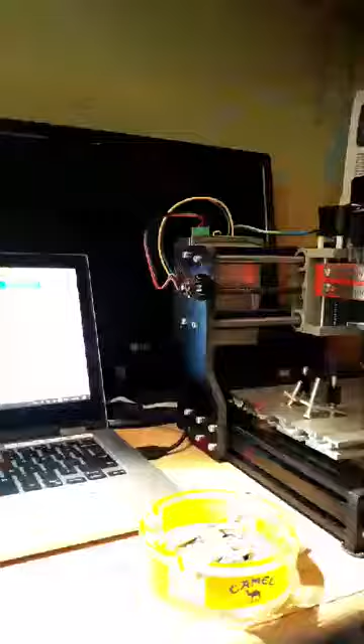I finally got my machine running today. I'll show you. I cracked my bracket, so I put these on. Works great. I did just a couple test carves, making some coasters. Here's one I haven't painted yet. And here's another one I have to finish sanding, but just been playing around with it.

Hopefully some more people will come on here. Oh, you're at work, huh, Timothy? It's pretty cool if you can watch us at work, man.

Today I was thinking about talking about the metric system. A lot of people seem to have problems with the metric system. And as I've told everybody before, inches and CNC do not play well together. Inches are divided up into 12, and everything in the CNC world is in 10 decimal. So it kind of makes it difficult to work with unless you have a machinist's ruler in inches that's divided up into decimal. That's the only way you can measure it and stuff.

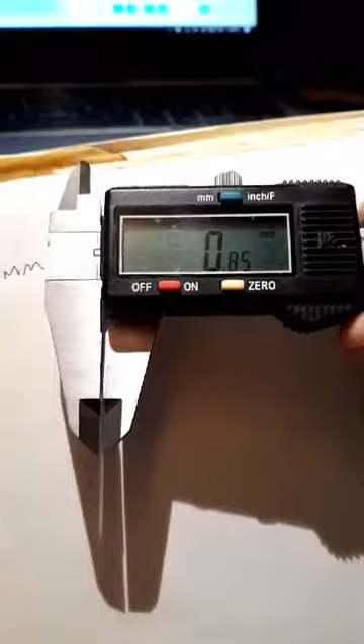But the thing about learning millimeters is, do not try to convert. If you're going to try to convert millimeters or the metric system to inches, you are shooting yourself in the foot. Okay? Do not try to convert it. What you want to do is learn it the way it is. Now, 1 millimeter, I showed you how small it is. I mean, it's about that wide, okay?

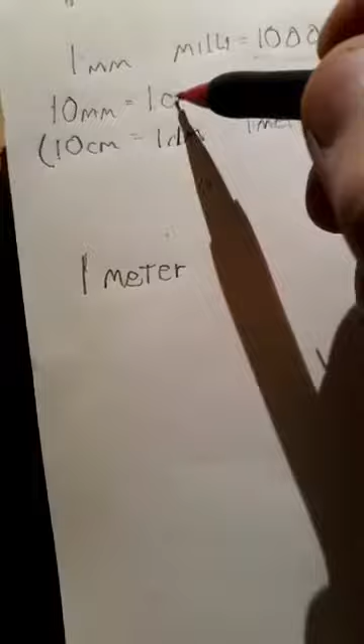This one here is basically never used, I'm just showing you. You have 1 millimeter, and there's 1,000 of them in 1 meter. A centimeter has 10 millimeters, and 1 meter has 100 centimeters.

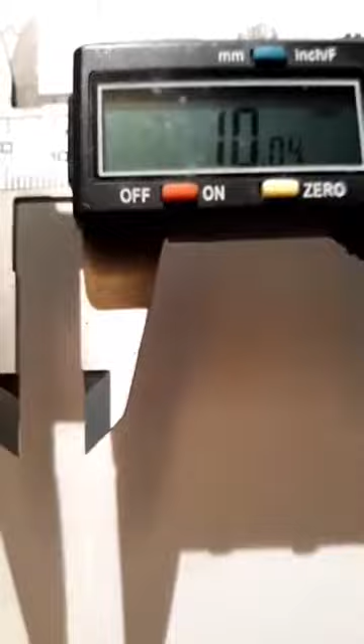Decimeters we're not really going to go through because that's never used. So a meter breaks down to equal 1,000 millimeters, and 1 meter is equal to 100 centimeters. I can show you how big a centimeter is, that's all it is, 10 millimeters. That's close enough, that's a centimeter.

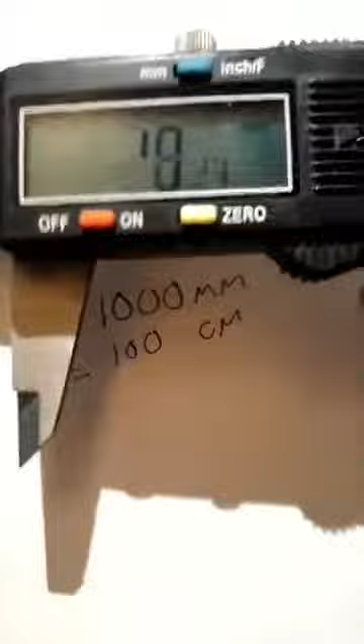Now there's actually 2.54 centimeters in 1 inch. So if I bring this out to 254, that's basically going to be 1 inch. Just to show you here, 1 inch, so it's basically 25.4 millimeters or centimeters... 2.54 centimeters to an inch, I'm sorry.

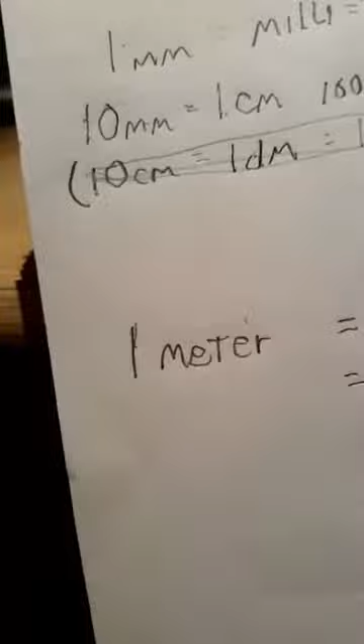But don't try to convert it, it's so simple once you learn the distance of 1 millimeter. 10 millimeters is 1 centimeter, and 1 centimeter is basically this big. So you have 10 millimeters in 1 centimeter.

Now the cool thing about the metric system is it's not just linear measurements. I'm going to show you, 1 liter of water equals 1 kilo. How much simpler is that? If you say 1 gallon of water equals, I bet nobody knows exactly how much it weighs, but that's how crazy the American system is.

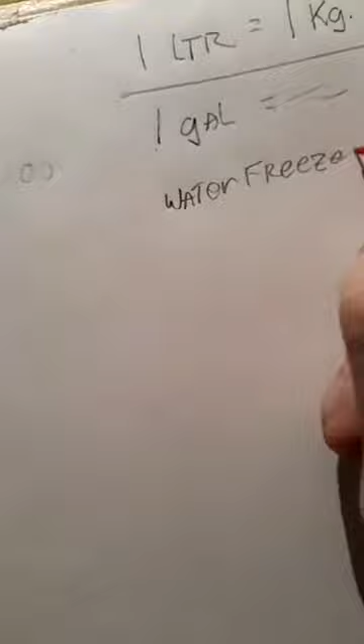Now get this, in the metric system, water freezes at 0 degrees centigrade, and water boils at 100 degrees centigrade. How much simpler is that? Whoever came up with 32 for freezing and 212 for boiling, how freaking crazy is that? It is ridiculous, it's ridiculous.

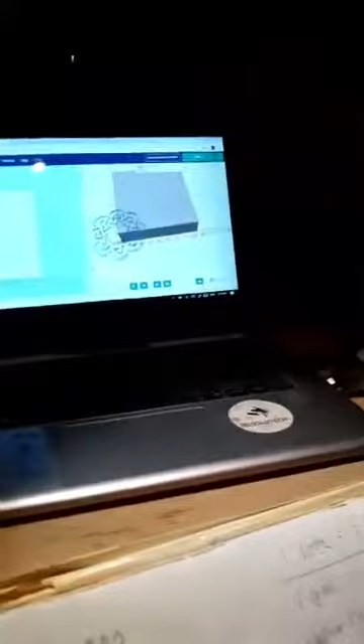I'm going to tell you how ridiculous the American system is. When you're talking about 1 yard, that's a yardstick. The way they came up with 1 yard was some king or somebody in England had measured the distance from his nose to his thumb with a stretched out arm, 900 years ago. Thanks, Andy, I bet you had to Google it, didn't you?

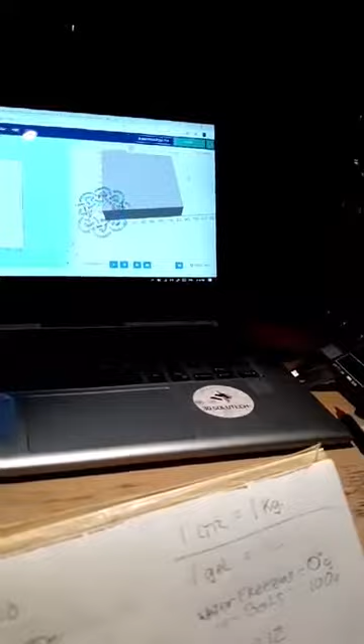Anyways, the metric system is so much easier. Like I said, water freezes at 0, it boils at 100. A millimeter is that big, you have 10 millimeters in 1 centimeter, and 100 centimeters in 1 meter. I mean, that is simple.

Now I'm going to show you guys a little bit about calipers. If you bought a pretty cool set of calipers, there's quite a bit you can do with them that a lot of people don't know.

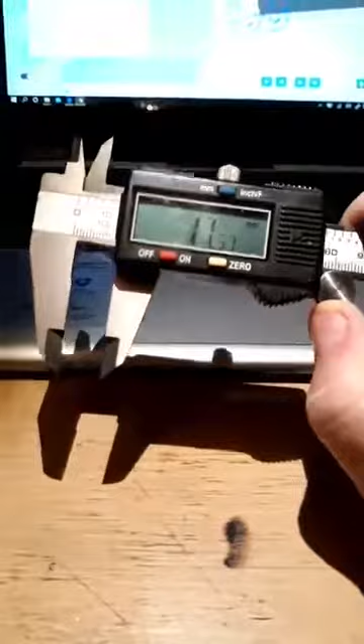For measuring outside diameter, this is where you use the jaws. The first thing you always want to do whenever you turn your calipers on is zero them. Bring it in, and if it's not 0, make sure you always wipe your finger down the blades to clean them off, clean any dust off, because it will make a difference. Okay, now it's on 0.

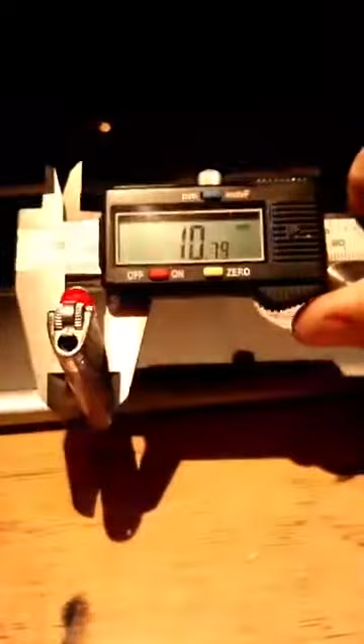Now, to measure outside diameters, I want to measure the outside diameter of this lighter. That's 10.79 millimeters, or 1.079 centimeters. Very simple, very simple. Now that was measuring outside diameters.

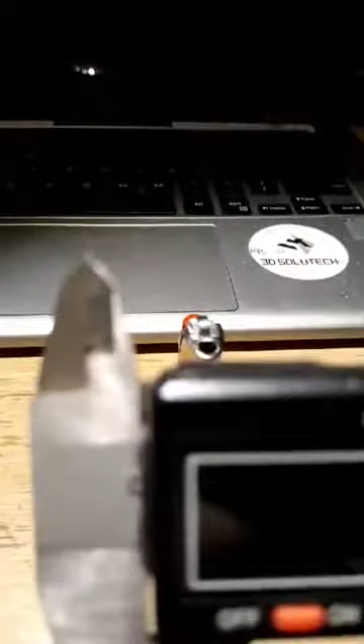Let's just say I want to measure the diameter of that hole right there on the lighter. Then you use the backside, these here are what they call inside diameters. You put that down in there and open it up. And that is 4.75 millimeters. So these here are for outside, these here are for inside measuring.

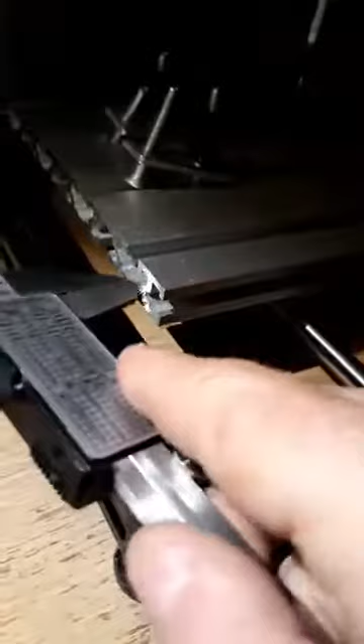Now I'm going to show you another thing, this part here, a lot of people don't even know this. This part here is for measuring depth. For example, I want to measure the depth between the top here and this bottom rail here. Very simple, I put my calipers over it like that, I just hold here, and that's all I do is push it down. As long as you're holding it perpendicular and you hold it down, right there you see it's basically 12.95 millimeters deep, and that's how you get your measurement. Just do it again, hold it, pull it down.

There you go, 12.6. I see I got garbage down in there. All garbage will affect your readings.

Now there's some other things you can do that are pretty cool. For example, if I wanted to measure the distance down here, and I got that 12.6 again, now what I can do is use this nut to lock it in place. There, now it won't move.

Then I can zero it out. So you can measure now. I can use this to put something in if I want to measure a drill bit. This ain't moving anymore. I can put drill bits in here and find the one that fits exactly. That'd be 12 and a half millimeters.

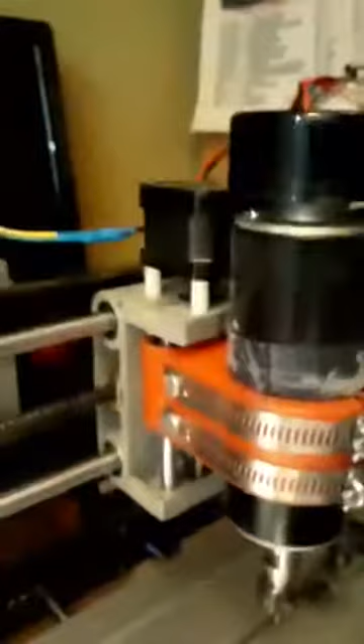One of the cool things I was going to show you is, let's say, right now I want to see how far my machine travels. So I bring this down, right to it, and I got it pretty straight there. Now I am 3.93 millimeters from the...

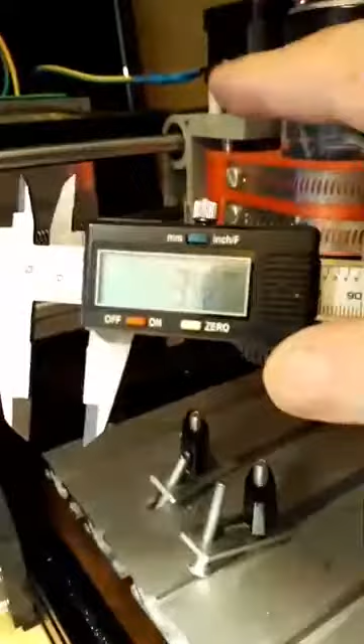I'm sorry, my bad, I got to zero it out because I zeroed it out before. Okay, I'll do it again. I put the edge of my calipers up there and touch right here. Okay, and that gives me 16 and a half millimeters.

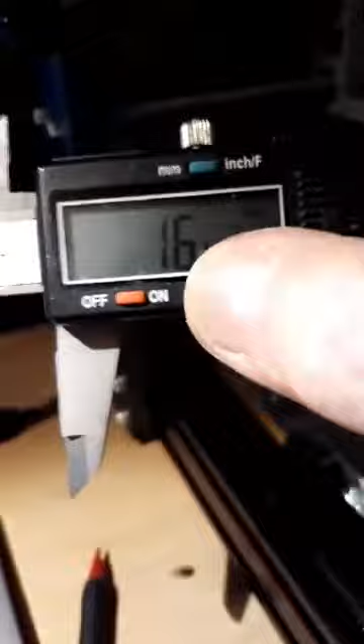Now here is where I can zero that out. Now what I'm going to do is jog my machine down. You know these intervals: 10 millimeters, 1 millimeter, 1/10 of a millimeter, and 1/100th of a millimeter. So I'm going to put 10 millimeters here and jog down one time.

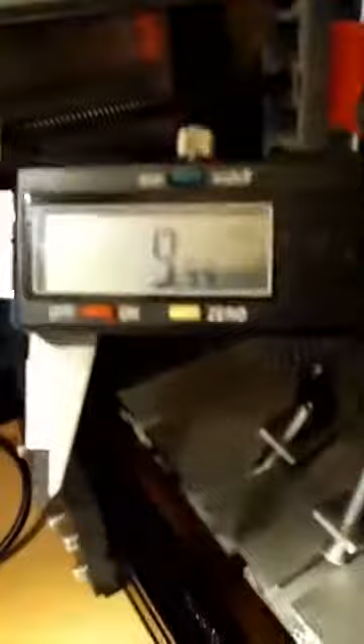Now, since I zeroed out my first measurement, I can just put it back up here again and measure again, and that should be pretty darn close. 9.99, that's 10 millimeters. Okay, so this is how you can check.

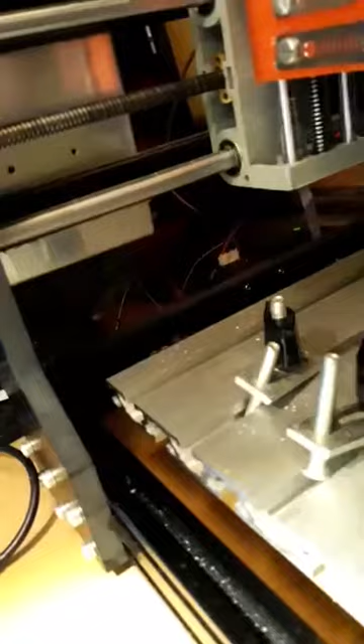Now if I take this here, and I zero it out again. Zero it out, boom. Then if I go up 10 millimeters, and then I can measure it again. And there it says minus 10.35 millimeters.

It depends how accurate you are and exactly where you're measuring it, but it should be basically 10 millimeters minus, because I had zeroed it out and it went up now. So that's basically how to use calipers. You use the wheel here to slide it, this screw to lock it if you need to, here's your inches, millimeters, and this one even has fractions, and then your on-off button, obviously. That's basically how it is with calipers.

If anybody was interested, I could always go into the other calipers, what they call dial indicators. Let me just see if I have any here. No, I don't have any here.

So we've talked about millimeters, centimeters, meters, and just like when I was talking about meters, 1 meter is basically 1 yard, almost a yard, okay.

Now we can talk a little bit about machines, upgrades. I've upgraded my machine here and put a big spindle on it. It looks like crap right now because I've been using it, and I had tape on it for another reason before, and I just haven't gotten around to taking it off. I actually cracked the lips where the screws come together, so I just mounted these two straps, and they really hold it well. There is no vibration.

Here I have my spindle RPMs, and it is quiet. I could sit here and talk, and if I go all the way up, what you're hearing now is stuff vibrating on the table. That's wide open, that's 12,000 RPMs. The cool thing is I can adjust my RPMs here the whole time.

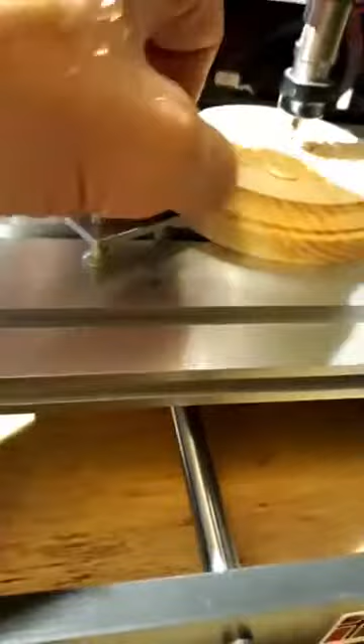What I did after I put my first piece on, I just made a drawing so I can line this up right on those lines, and I can put my clamps up. One there, and I can put one here, and then I can put one up here. Just a second. Put one there, and my other last one right there. Now I've got 4 clamps.

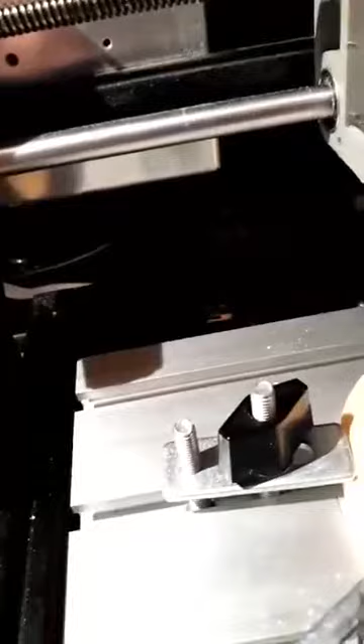Now you see my 0 point is basically, let me see, I just got to move it over a little bit. A little bit. Wait a minute. There. Now, don't worry about that little dark mark you see on there, that was just a pencil mark I made, but that was not correct. So now I have my part secured down, and I have my 0 point right in the center. So that's all I have to do now is bring it down.

I'm going to show you guys one little trick about Easel. When you go to Machine and you go down to Advanced, okay? Advanced, here, right here. Hold up. Only modify these settings if you know what they mean.

Usually on your machine it'll probably say 3.8 or 4 or whatever. I think it's 3.6 or 3.8. That is how high, once you set your 0 point on your material, that's how high it's going to go up every time it goes up and moves over. I set mine to 4 millimeters.

Because now, when I want to place this on my piece of wood, I can go up here to my jog, hit jog, put it on 1, and watch this. I can go down 4 times: 1, 2, 3, 4. I am dead on the top of my piece of wood, because I just took this piece off a little while ago. And it always stops at 0 point, and it'll stop there because I have 4 millimeters set. So now I know it's 4 millimeters above my part whenever I start the program.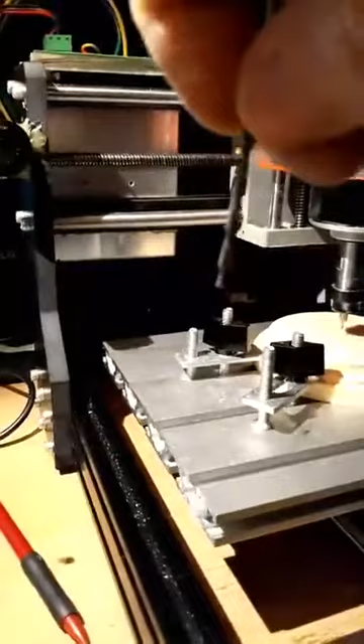All right, now this is a pretty long tool, a very long tool, and this one here is actually a down cut. As it's turning clockwise, you can see how it's pushing the stuff down. It'll be pushing all your sawdust down instead of trying to bring it up. All the other ones go this way when you're going clockwise, bringing the chips out of the holes.

All right, now, I have seen people put a tool in their spindle and it'll be sticking out about this far.

Believe it or not, these tools, as they are carving, they're bending, depending on where it's cutting. It's flexing, believe it or not. You won't be able to see it, but if you measured really, really accurately, you can see that your cuts are not going to be the exact diameter. It'll be a little bigger because these bend as you're milling.

Now, like I said, I've seen people put them in the collet like this. First of all, this part right here without flutes is called the shank. Now, the program Easel could not care less about the shank. You could have a shank that big around if your machine could hold it, and Easel doesn't care about it. Whenever Easel asks you for a diameter for the tool, what they call the bit...

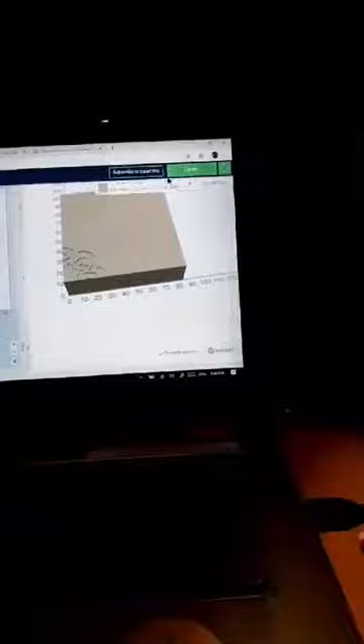Here in bit, I only use other. I don't use any of this crap. Don't worry about any of this. As long as you're not going to pay for the pro version, forget about all this. You only need to use this right here.

Now, when you are measuring a tool and you want to measure the diameter of it, try to get it like this.

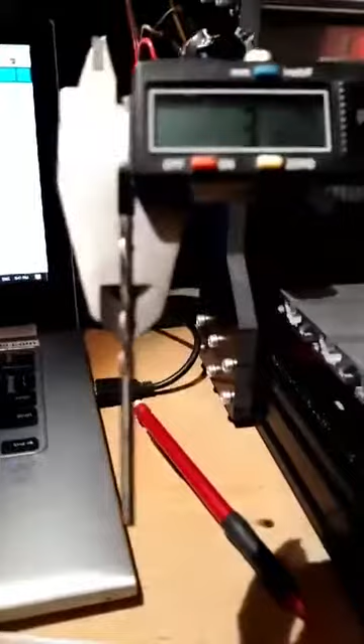All right, let me just zero this out. Okay, one second here. There, I'm just trying to get this with one hand. All right, this is how you measure a tool. You put it in like this, and it tells you right here.

This is 3.1 millimeters in diameter. Okay, and you can turn it, you can turn the tool and measure again. And here now it's 3.07. So basically you can tell that this is basically a 3.1. Now see, here's 3.15. It's all about just, you have to keep turning your tool and measuring it, and it'll give you a damn accurate reading.

Now, when I was talking about the tools, okay, here's a collet. A lot of people don't understand these either, believe it or not. If your collet is correct, then you can turn it upside down and shake it and nothing comes out. It's stuck in there. To get it out, you push it down till it snaps. You'll hear it kind of snap. And you see how it's cockeyed there?

Then what I have to do is, just one second, I grab a pencil eraser, and once it's cocked in there, I just take the pencil eraser, pop it, push it right out, and then it comes out. Okay, there's your collet.

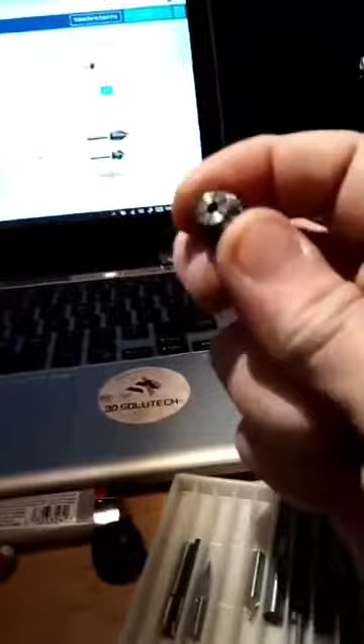Whenever you're going to change tools, I recommend that you take your collet out. You see all these slots here? If you get one piece of dust or crap or a piece of wood in there, it's not going to compress uniformly. So in other words, your tool will be off center. So you really have to keep these clean.

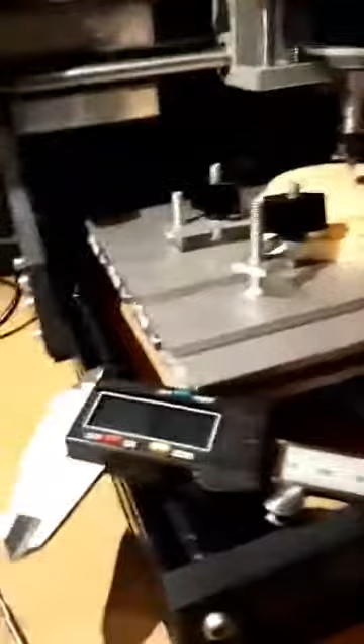Keep these clean. When you take your collet nut off of here, sometimes you can go up with a Q-tip. There's a cone up here, and that cone, when this goes up, is what presses it all together. Take a Q-tip and clean out up in there once in a while. But really, I recommend that you clean these every time you change a tool.

Now, to put it back in, you drop it in like this, and you push it down till it snaps. There, now it is correct.

If you are putting it in your machine without snapping it in there, if you're putting it in like this, and you see how far back it is, and you tighten up this nut, it's going to be screwed up. Okay? It will be screwed up, and your tool will not ride 100% true. So put it in, push it down, and you'll hear it snap in there. Doesn't come out. Okay, now when you put your tool in there...

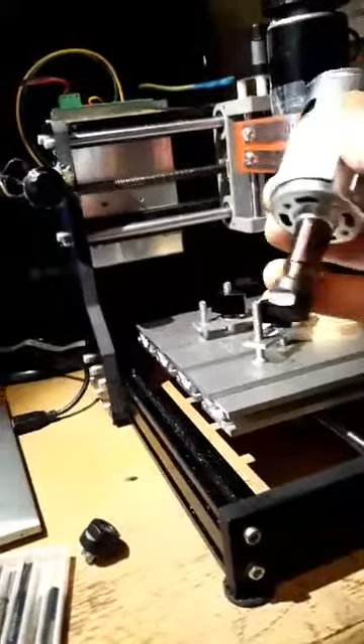What you have to do - now, you people that have the regular spindle motor on your machine, the original one, this original crappy one that doesn't have bearings or anything - they last about a month if you're doing a lot of carving. This is a retail, this is a $4 motor, okay?

And this motor here, with the potentiometer and the power supply, actually comes with a big aluminum bracket that you can't use. I paid $69 for it, okay? And then I printed out my own bracket, which I do for people that want to upgrade. I print them out on the 3D printer there. Here's one that's printed out, and this one's ready to be mounted in a printer or in a machine.

I was talking about RPMs and feed rate. Now, as much as I've said it, as much as I've talked about it, for some reason - do not ask me why - but people just don't get it. What I'm talking about is when you click on carve, okay?

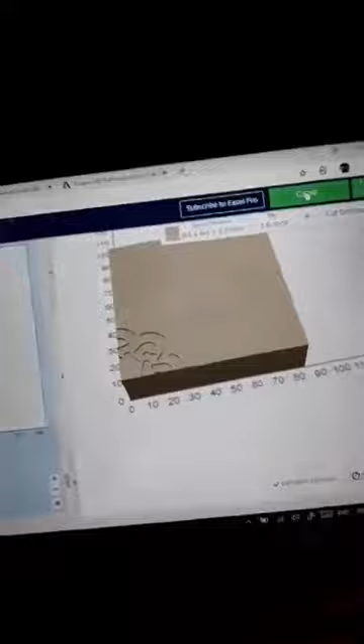And you get this window up, and you go through the first one - confirm material thickness, da-da-da, clamp down the material, da-da-da. We've done that. Always read every one as you do it. This is just like an aircraft checklist - this is your checklist so you don't screw up and miss something. And that's all it does.

It's telling you here that I have a 1.6 millimeter tool, okay, I confirm bit size. Boom. Then it says right here, move your machine to your front left corner if that's what you're going to use as your 0 point. Then it says lower the bit to the surface of your material. Then you want to use current position because you just set that position. Okay? You click on this, then it comes over here.

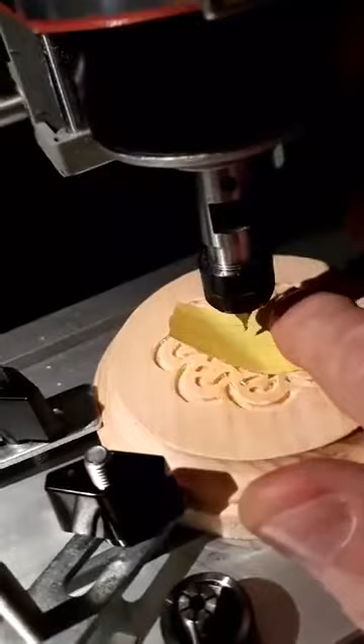The first thing that happens is when you bring your tool down to touch it off, I sit like this with one hand, and I click down, down, down on the Z-axis until the paper stops, okay? First I'll go down with 1 millimeter, and when I start getting real close, I'll go down to 1/10, and I'll just keep clicking and clicking until that paper stops. Once that bit has stopped the paper, I leave it. Don't worry about the paper.

Because in this window here, what does it say? It says raise the bit, okay? Now, so if I raise the bit - and I went a little bit too far because I have such a high piece here and my spindle is down - but anyways, you raise the bit, and then it says, I have a manual spindle, so it says confirm that your spindle is on. All right, so I turn my spindle on. All right, my spindle is on.

Now, as soon as I hit carve here, my mouse, I'm going to be right up here. Right up here, because right here I'm going to show you what happens. Now I got my mouse right here. All right. Now see, I just stopped it - I stopped it so nothing would happen. This here, this disappears - as soon as you start carving, that disappears and you have the red cancel. It will cancel the program and bring your 0 point back.

It'll bring your spindle back to your 0 point. Now, next to it, you'll have the 2 bars, which mean pause. So let's just say, for example, you're carving away, okay, and you see up here it's going to give you a time, how much time you have left. And then you're going to have feed override. I don't understand why some people just don't get it - the feed override that comes up here when you start carving, it is your gas pedal and brake. This is how you adjust your machine to make it sound like a sewing machine.

These machines, for those of you I haven't spoken to before or that are new here, I'm going to tell you something. As soon as that bit goes down into the wood and starts cutting, the whole machine is going to be talking to you, the whole time. And what it's going to be telling you is, hey, I'm just scrubbing my tool. I ain't doing crap, that's all I'm doing is making dust. So I need a faster feed rate or slow my RPMs down.

You people that don't have manual adjustment on your RPMs, you're kind of screwed. The only thing you have to play with is your feed override. You can increase your feed or you can decrease it.

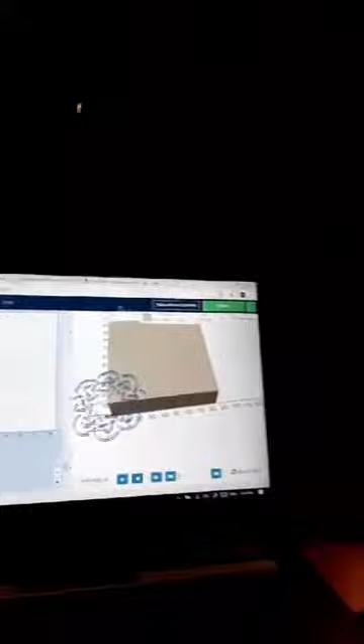Myself, right here on my cut settings, I have a feed rate of 150 millimeters per minute. I never touch that, and I never touch this. I only adjust my depth per pass per material being used. The harder the material, the less the number on depth per pass.

If I was using, for example, Purple Heart, this stuff is hard like a rock. Now, if I was to carve this, I would probably have a depth per pass of probably 0.2. And if I was using even softer wood than pine, I might go up to 0.7. But I never touch these.

The plunge rate is the rate at which the tool is going down into the wood. These are not drill bits, they don't like to be pushed directly into the wood. They are not drill bits, these are milling bits. So we slow it down to 75 millimeters per minute.

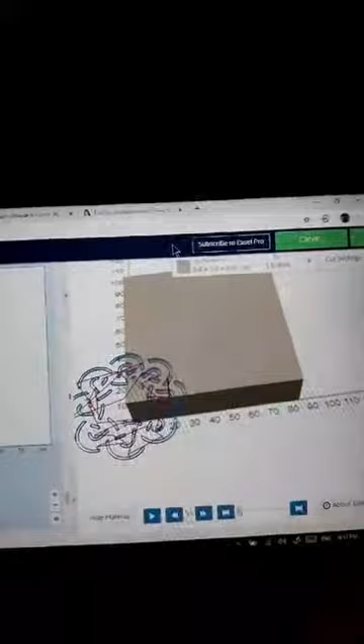These two numbers I never change, because as soon as I start carving, up here I get my feed override and it will say 150 right there. It'll have a big plus sign and a big minus sign. With the plus sign, I can increase my feed rate up to 200%. And 200% of 150 is 300 millimeters per minute. Or I can use the minus sign and bring it basically down to 0. So I can go from 0 to 300 millimeters per minute just by adjusting my speed there.

Now, like I said, these machines are going to talk to you. I mentioned one thing, scrubbing - running a high RPM with a very slow feed, and you're just scrubbing your tool against the walls, and you are dulling it. That's scrubbing.

Then you have another one called chatter, and I'm sure you people have experienced chatter. What it does, chatter, it'll be bouncing, really, and that tool is going to be chattering the whole time. Within about 30 seconds, that tool is ruined. That's how bad chattering will tear up a tool.

Since we're on the thing about tools, I'm going to mention a couple more things. 90% of everybody out there, you're running these tools here. Everybody has seen these. 3.175 is equal to 1/8 inch shank, that's the shank. And these are 22 millimeters long.

So those, and you have some more here. Now this one here is the same, but these are ball nose - these here are rounded at the end. These here are flat end, right, they're flat right at the end. And then you got some more here, you see these? These are flat end. Those are flat end. And then I have some more of these.

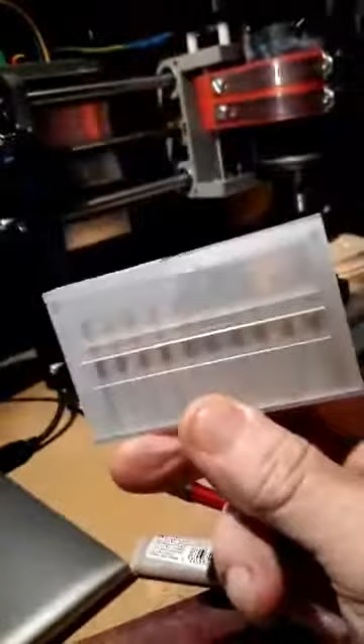Yora Home sells these for 25 bucks. Amazon, you can get them for 10 bucks. Now, think of this - 10 bucks for 10 tools, that's $1 each. You better stock up on a bunch of them, because with tools, you get what you pay for. In other words, these work fine for hobby use, but don't expect them to last very long.

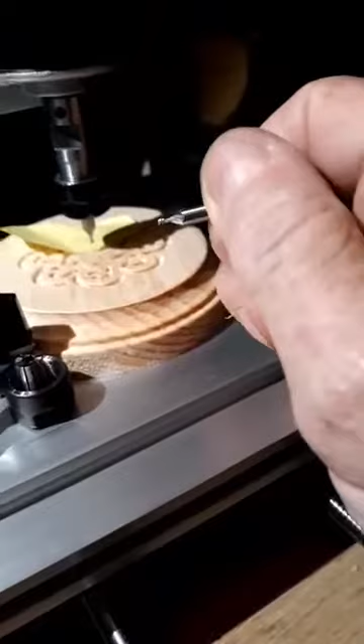And since I'm talking about that, there's one I want to show you here. The tool that I have in here is a milling tool. A lot of people say, oh no, that's a spot drill - it's exactly like a spot drill they use on a lathe or something. This is not a spot drill, this is a tiny end mill. Now these tools, they come... let me see if I have one here. Uh-oh. Okay, I got one, yeah.

I just lost my box there.

Here is what the tool looks like. You have two ends on it, and what I do is cut it in half so I can get most of it. You see how much is sticking out? I have very, very little sticking out of my collet. So instead of using this at full length, sticking out that far, I don't want that. I bring it down as close as I can, so I cut it with the angle grinder.

Remember I told you, these tools here are $10 for 10 of them. This one here is a $38 tool, and it will probably last 100 times longer than those. I don't recommend you get these high dollar tools until you have learned your machine really good. You put this tool in, you screw up, it hits your clamp, that's $38 right down the drain. Boom, gone. So I don't recommend high dollar tools yet, but it's something to think about later on.

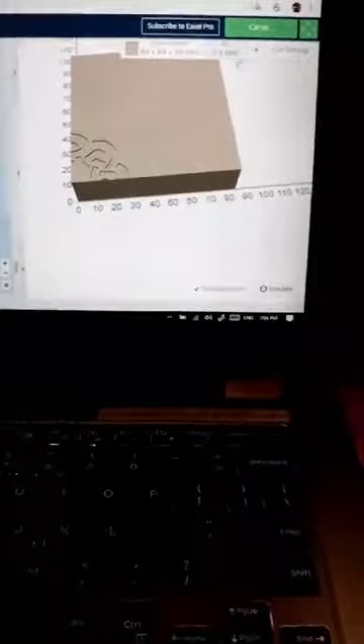1/10 of a millimeter is not much at all. But it is going to give you... let me see if I can find some stuff that I've done. I usually always have examples, and I don't know what I've done with it. Let me see here, just one second. No, I can't find it, but I have some pieces in here that I know of.

Now, here is where I was telling you how if you tried to cut deep with these tools on plexiglass, you see here it melted on the tool, got real big, and then just broke. But if you use this tool on plexiglass, you get letters like this, about half a millimeter deep, and they come out beautiful. I wish I had the other parts to show you, but here's some of the things I've been playing with. Like I said, those tools are only for engraving, no deeper than max depth 2 millimeters. If I'm going to carve or engrave plexiglass, I usually don't go any deeper than half a millimeter. You don't need to do it.

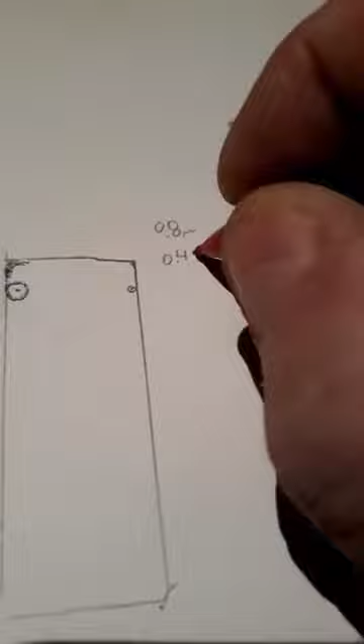So to get a sharp corner, you have to use a tiny bit. A tiny bit will cut out, but it'll still leave a radius. You will never be able to get a sharp corner going from the inside - the only thing you'll get is the radius of the tool you're using. So using a 0.8 millimeter, the smallest one in that box, this corner will have a 0.4 radius, which is not very much. But it still will be a radius. I mean, here you can't really see it, but there is a tiny radius there, and here - right there's a tiny radius.

Now let's say I cut out this pocket. I can use one tool to hog it all out, and then use a tiny tool, and it will just go around the edges and clean it up. It won't make square corners, but it'll make them look better.

All right, then you use the exact same template, and you tell the machine the piece you want to put in here - you tell it you want to cut outside of the shape path. So this tool is going to go down, go around, and cut it out. Now a round tool can cut a perfectly square corner here on the outside, because that tool will just come down and turn and cut exactly a square corner.

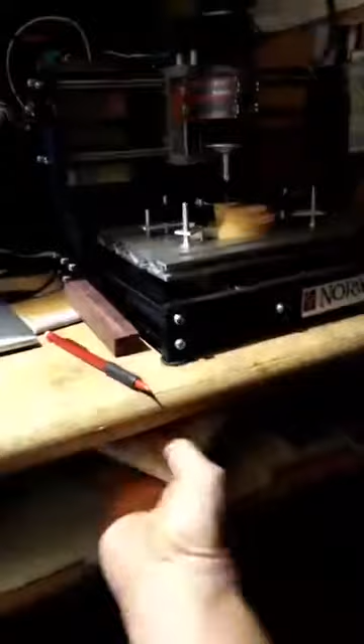I can tell you one thing that really scared me was a 6550 laser machine, laser CNC, okay? And what they did was they left it unattended. And guess what happened? They came back. Something had happened in the program. The movement stopped. The laser sat there with full power, burned through the piece of wood they were using. It burned down into the table that it was on, a dining room table.

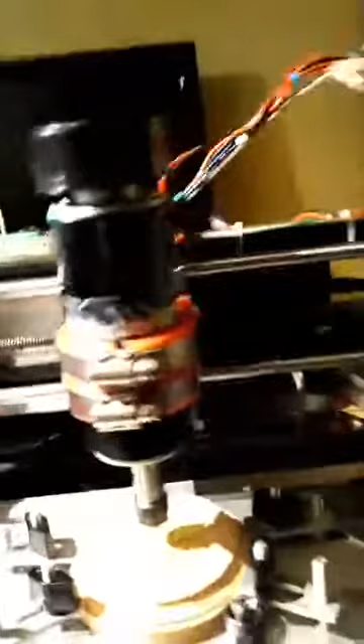I'll show you one thing here for you people that might not know it, people that have not seen. Now, if you have a 3018 and you have your wires hanging off the back, I'm going to tell you something - it's not a question if they're going to get caught on something, the question is when they get caught on something. They will tear themselves out, then you're going to be up a creek without a paddle. Okay, now check this out.

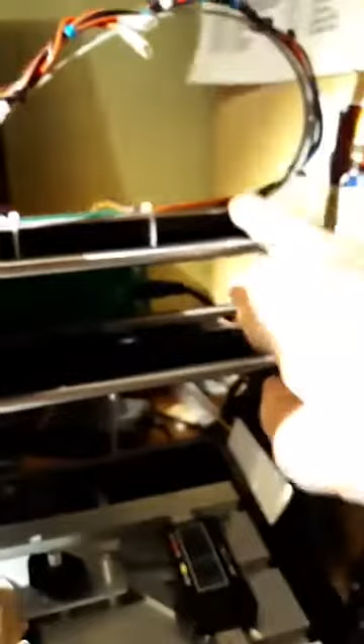That's all this is here. This is a tie strip, the kind that heating and air conditioning guys use. They're the big ones, long ones. This one I think was 4 foot long, and I just cut it down. And I strapped just the tie strap to the frame, and then from here I strap my wires. Now check how nice this moves.

My wires will never, never get caught on anything. So that is a cool way to put your wires up so you don't break them. Because in the CNC world, if something can go to shit, it will. Okay? It will, I'm not joking, it will. And like I said, these machines are totally capable of tearing themselves apart. The torque on these stepper motors - the stepper motor on the side there, and on the back there, and on the back all the way in the back - they are powerful.

With that being said, stepper motors work with pulses, on-off pulses, and they have a pretty high amperage pulse, pretty strong pulse. Now what happens there is that the wires that go from your board to your stepper motors, they are like antennas - they are emitting those pulses out into the air. If your USB cable, your communications cable that's plugged into your computer, is running parallel or next to stepper motor wires, it will screw up.

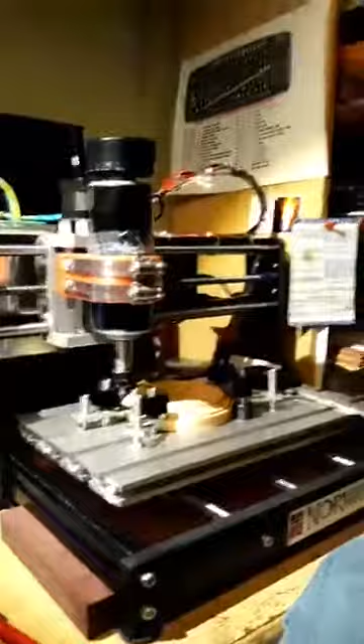And I have dealt with this for as long as I've known 3018s. And what happens is the board on these machines is an Arduino board, but not really - it is an Arduino clone, made in China. These machines, all 3018s, are made in the same factory in China. The only difference is you have different people that sell them, and some people gouge on prices. I'm not going to mention any names, but some people gouge on prices. You can get this machine as low as $189. Okay? But what happens with these Chinese machines?

In China, they do not know the word quality control. What they found is those boards that they make - if they make 1,000 boards and they send them out untested, if they get 10 back, they don't care. They're looking at all the money they saved by not testing them. Okay? And it's really shitty, but that's the way it is.

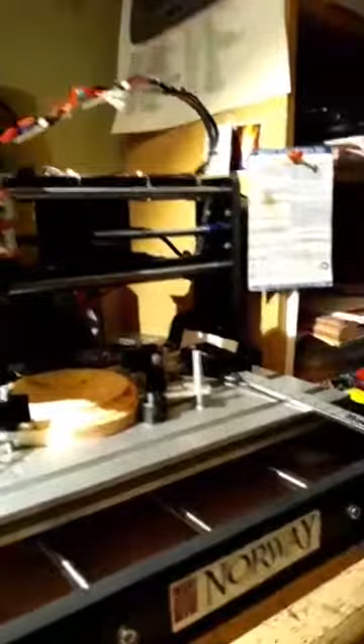That's how China works. Now also, these being clone boards, Chinese will do anything to save money, and they use the cheapest components there are on the market. If you had an original Arduino board on your machine, you would never have to worry about electrical noise from the wires from your stepper motors. Okay? You'll never have any problems. But these boards with the cheap components, they are susceptible to noise, electrical noise.

So what happens is if your signal cable is laying right alongside the stepper motor wires, you could have a 14-hour job, a project, and after 13 hours, all of a sudden, it shifts.

It'll shift in Y, or jump in X, and just keep printing. What happens is the signal going from your computer to the board got garbled by electrical noise from your stepper motors, and it screws it up. You can't go back and fix it. That one is down the drain.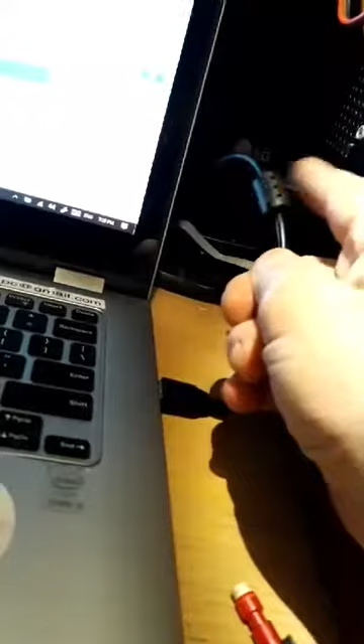So always keep your signal cable as far away from your stepper motor wires as possible, and make sure it has a suppressor on it. This is a noise suppressor. You can actually buy these from Banggood, a pack of I think 10. These are noise suppressors.

Now one more thing. It doesn't matter what machine you have, a 3018, a 6550, a Shapeoko, a LongMill, whatever. If you do not turn off your screensaver or sleep mode, and say it's programmed to go to sleep after 2 hours and you're in the middle of a carve, guess what? Your machine goes to sleep, everything goes to crap. It stops and you can't recover it. Turn off your screensaver on the laptop or computer you're using with a CNC machine.

Another thing, never have two CNC programs running at once. In other words, don't have Easel up and running and in the background have LaserGRBL running or something like that. You're asking for trouble.

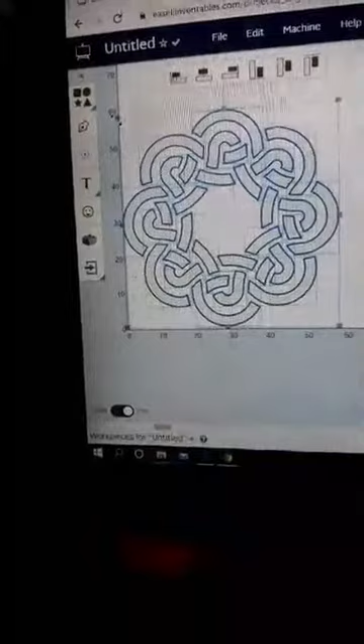Now watch this, go to inches. I mean that is about as useless as tits on a bull. That is useless, useless, and it's just as useless as the rest of the inch system. So use millimeters, you'll get a lot more accuracy. And once you learn it, it is the simplest thing you'll ever use. You'll never have to screw with 1/64 or 1/16 or an eighth or a quarter. That will be all out the window. You have no use for it in the metric system. Metric system, a 10 is a 10 and 100 is 100, okay?

It's really, really simple. You just have to take the time and sit down and learn it. That's all, and it's not rocket science. It really isn't. Like I said, if you have 10 fingers, you got it covered. You don't even have to take your shoes off.

So that was all about the metric system and tooling. Now, on one of my next videos, I'm going to have to do laser engraving. I have a laser unit for my machine here, and I can do laser with it. On the 6550, that is strictly laser.

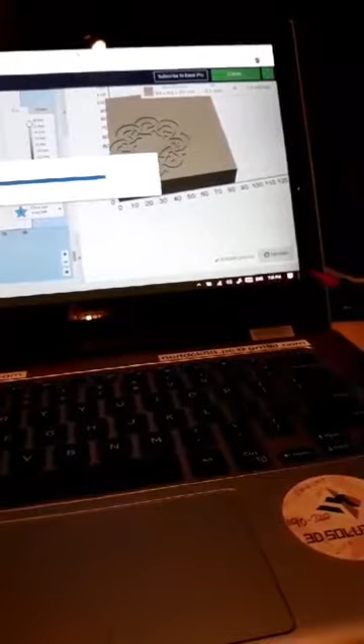And here I can simulate everything. This here is just like a cassette player. Some people don't know this either, but I'll show you. This is play, and then these two here, this one and this one, you see it says times one.

So if this job says it's going to take 6 hours and 47 minutes, and you hit play at times one, that means it's the normal speed you're going to be running, it'll take 6 hours and 47 minutes. But who wants to sit around and watch that? So using these, you can increase to times 2, times 4, times 8, times 16.

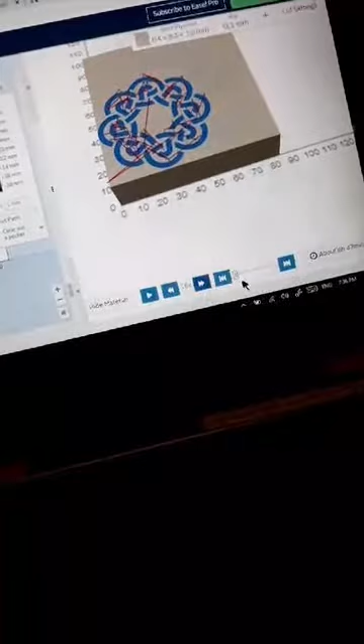These two here — this is fast forward all the way to the end of the program, and this is rewinding back to the beginning. Then I just hit start, play. Boom, you can see it's doing everything it's supposed to do now, and it's doing it at 16 times the regular speed. It'll show you every one.

Now I'm only using one tool, so it's only going to be red. If I'm using two tools, it'll be red, and then the finishing tool will be in green. Here you can pause it, and say I want to go even faster — 32 times, that's as fast as it'll go.

Now I continued, and you see it's working, going faster. But that's how you really get to see what's going to happen with your carving.

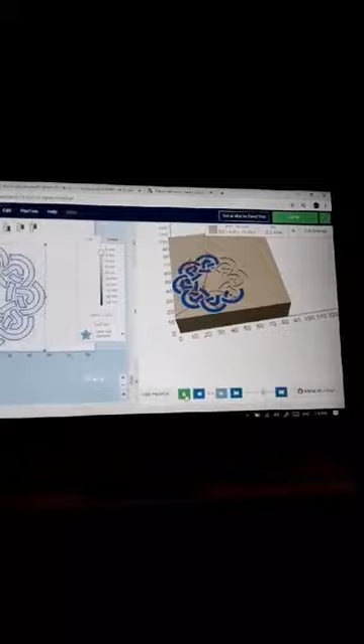And another thing I tell people: this 3D representation here is an exact representation of what you are going to get. If that preview looks like crap, your piece of wood is going to look like crap too. It gives you a 100% reality check, it really does. If that preview looks good, then your piece of wood's going to look good.

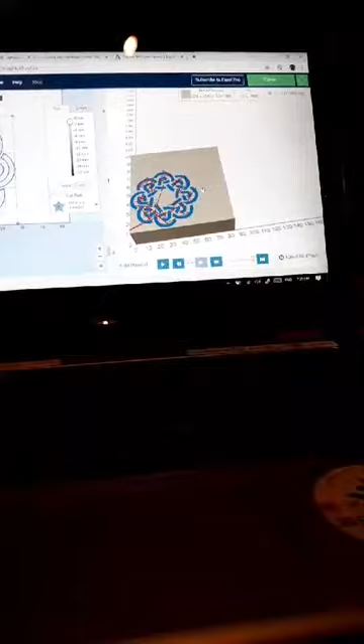Now, that there was one I just carved out before I was talking to you guys, and this is what it came out like. I just have to clean it up now with some sandpaper, but that's what it came out like. So that preview is a 100% representation of what you're going to get.

Now, you guys got enough to think about? These machines are a lot of fun. And I can just say one thing: when you get a machine like this, I see it time and time again — people get a machine like a 3018 or a 6550, and the first thing they do is put some expensive bit on it, get something like this, and try to make a present for somebody. And they don't know their machine yet, they haven't learned to use the machine.

When you first get your machine, you have to be aware of one thing: you will get a lot of firewood. If you don't screw up, then you don't learn — that's what you learn from. You learn from screw-ups. Everybody does them, everybody makes mistakes, but that's what you learn from. And that's no joke.

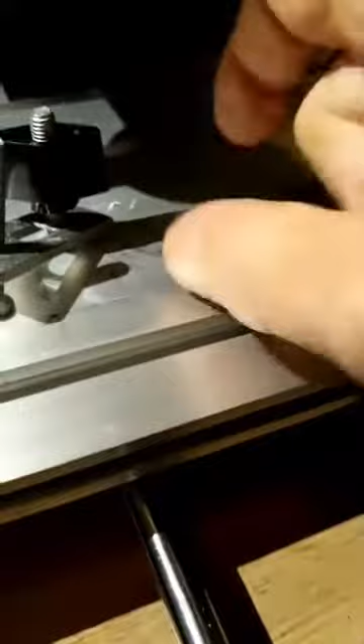This representation is never going to change. If you have your piece of wood on there and you put your 0 point here, it's going to start carving over here. That representation is always going to be there. This is where you actually set it up. So if you have that distance and you put it on the corner of your piece of wood, it's going to carve it over here.

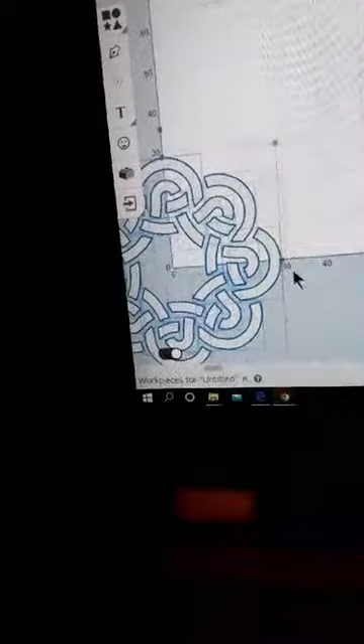Now watch this. I grab this and move it down here and align my handles exactly right there. You see my middle handle is exactly in the center, and this handle here is exactly on that line. Guess what? My 0 point is now right here.

This representation here will only show you if you use your 0 point here. You see it right here, telling you this is your 0 point. There's no way to change it here. This is just a representation.

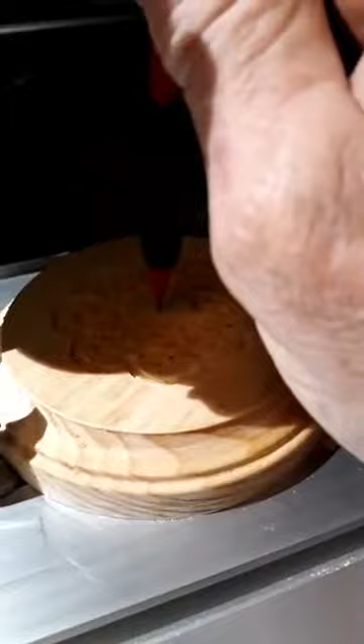Now, on my workpiece, that's all I had to do. I know where my center is, and that's all I do is bring my tool to the center and touch it down, and that's my 0 point. There's my 0 point in the middle of everything, right there. I take it out, and there's my part right there. You can see actually where my tool touched down.

All right, so that is how you do something if you want to center it. Use the 0 point the correct way.

Now if I was to move this object way up here, that distance is still going to be that distance. So just to give you a visual, if I put my 0 point here, it's going to carve up here. Your machine has a floating 0 point. Wherever you put your tool down on the piece of wood, you're telling it that's where I want my 0 point to be. And then it's just like here, that's where your 0 point is, 0, 0.

And wherever you put that down is going to be 0, 0. But you see, the difference of that distance here is going to be about 28, 27 millimeters above, and about 20 millimeters to the right from your 0 point. So remember, this window here determines your 0 point. This is how you manipulate your whole 0 point to be wherever you want it.

If you want your 0 point right down at the bottom left-hand corner of your object, fine, right there. Move your handles so that they're lined up there and lined up here. And then, if you want your 0 point exactly in the middle, you just move it down and line up your handles again.

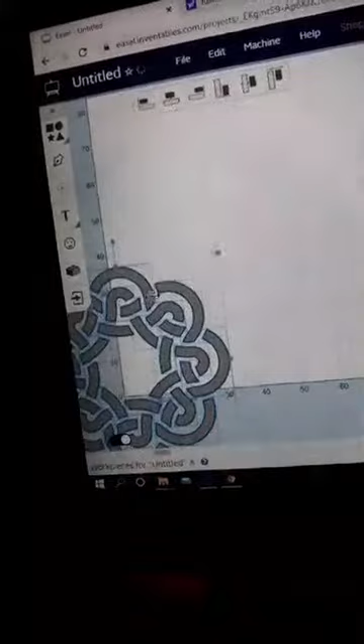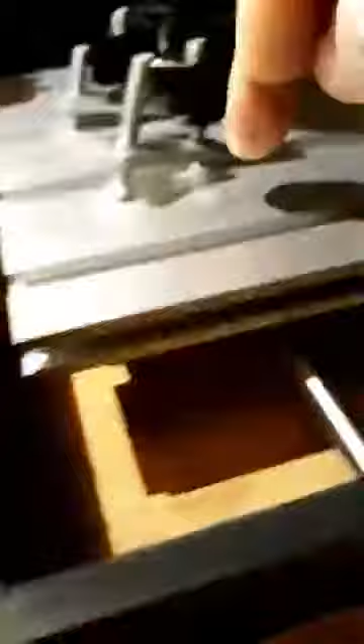So I line it up. Right there, I'm lined up there, and I'm lined up here. My zero point is exactly in the middle of my piece, my object. Wherever I put my zero point, my object is going to be right around it. I could put this over here, and it's going to be right around it. I can put it over here, it's going to be right around it.

This is a floating zero point. Okay?